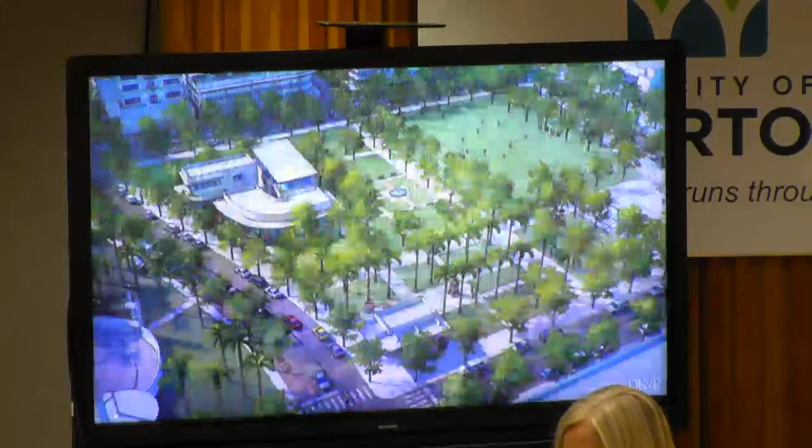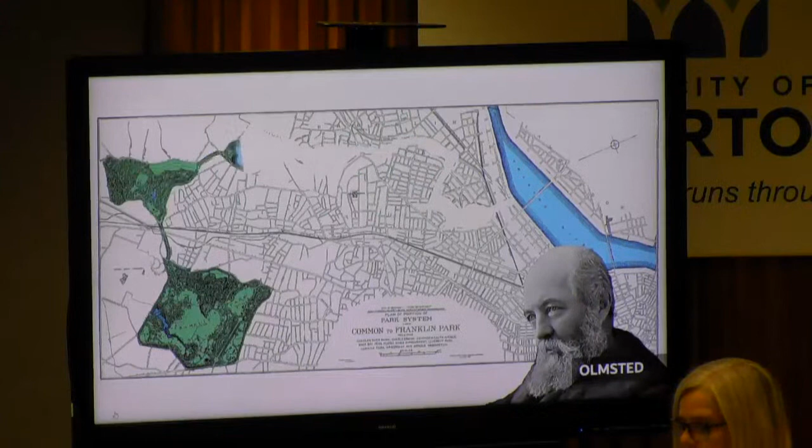The design of cities begins with streets and squares and neighborhoods, but it also depends on parks and open spaces and the connections between them. Parks, greenways, and blueways give form to the neighborhoods and bring nature into the city. In many ways, the modern profession of city planning was born with parks. Progressive reformers concerned with public health in the smoky industrial cities turned to landscape architects to create ample, green, open to the sky spaces where people could relax amid nature, and the water and air would be cleaner. Frederick Law Olmsted's idea for Boston's emerald necklace of interconnected parks and green corridors was a public health idea, a water cleanup idea, not just a recreational one.

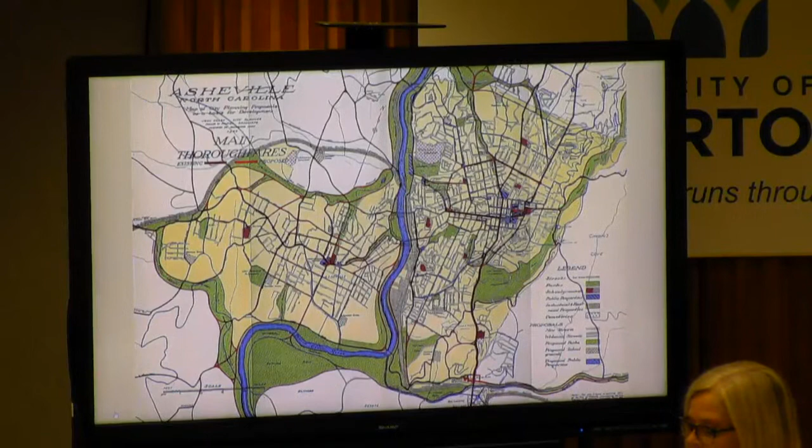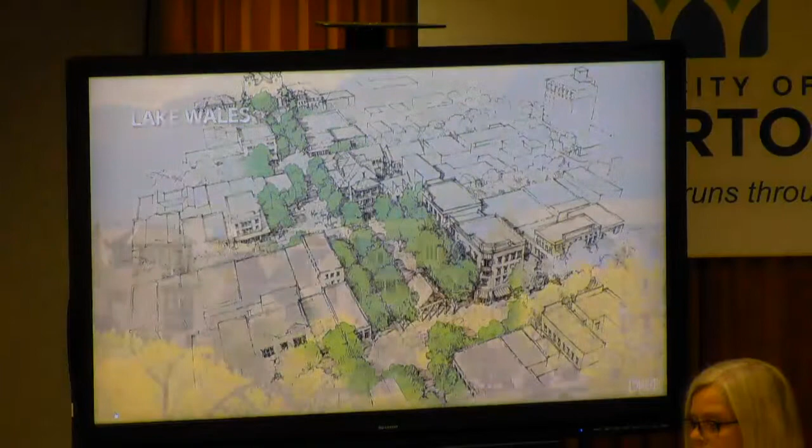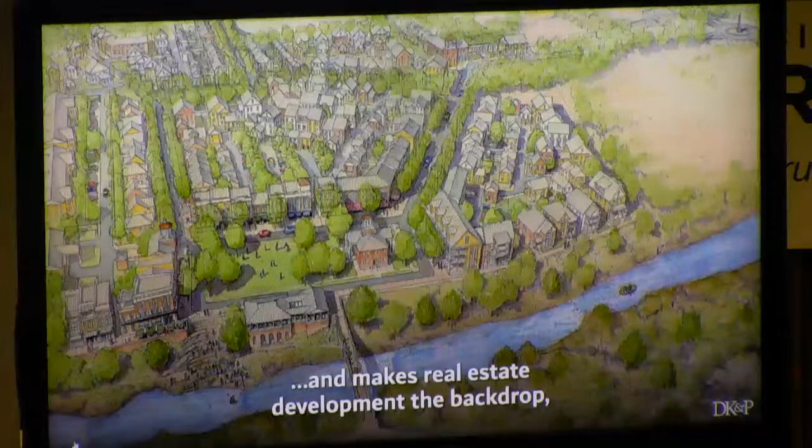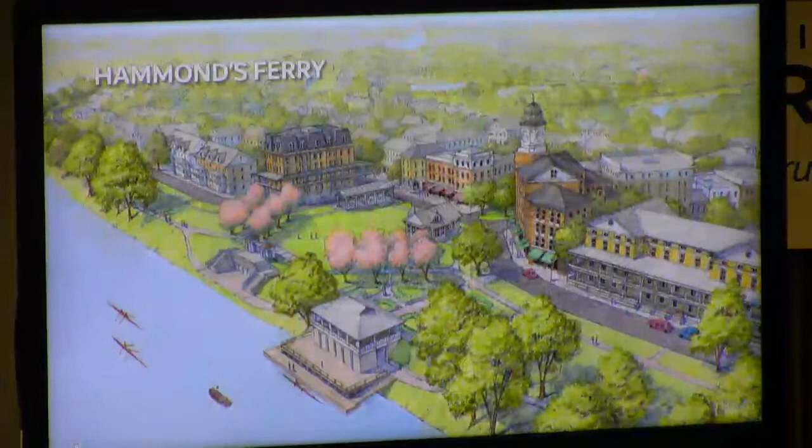Today, parks and recreation programs are often operated in their own separate departments, quite apart from the day-to-day work of city planning. But really all the plans should be integrated, especially now when park spaces hold the life-saving, economy-saving solutions for urbanism in an era of climate change.

Everyone deserves a great park. A basic national goal has been set of having park space within 10 minutes walk of every home. That's a start, but it's not just a matter of keeping the distances short. We also need good means of getting there. Non-motorized transportation on bike-friendly, walk-friendly streets and multi-user trails are all needed to connect our local parks to where we live and where we work and go to school.

Today we should think of what Mitchell Silver calls parks without borders, extending through these connections to give everyone the option of a park life. Even larger scale trail systems like the East Coast Greenway are gradually taking the interconnected web of park life to the next level, allowing for long non-motorized commutes and for bike tourism.

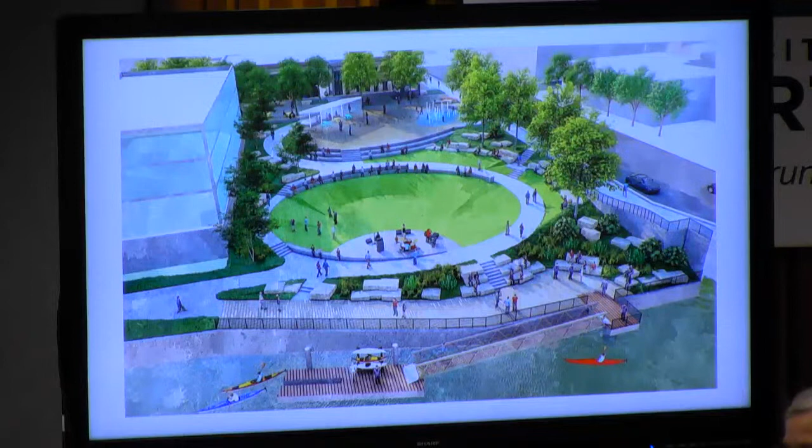This one and the next two, I included just to remind us what we've been working on so hard for the past couple of years. Every time I see these pictures they seem new to me, this was a shot I had never seen before. This is from Main Street, looking onto the west end of the park with the library off-screen to the right, and that was just a neat shot for me to see, it gets me pretty excited. It may not end up looking exactly like this, but it's a really neat shot.

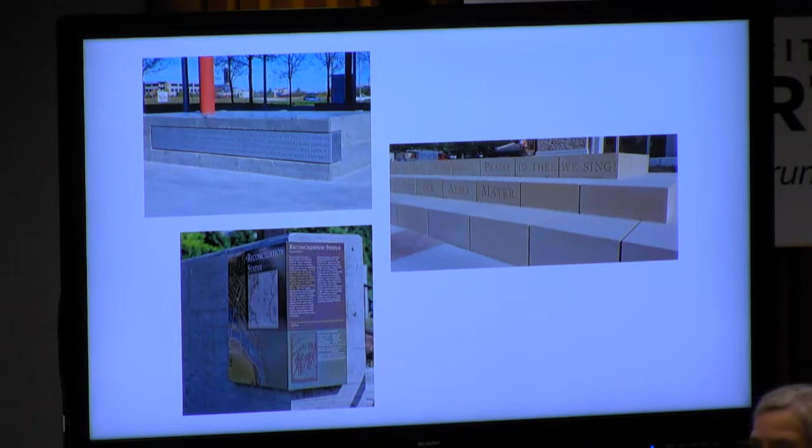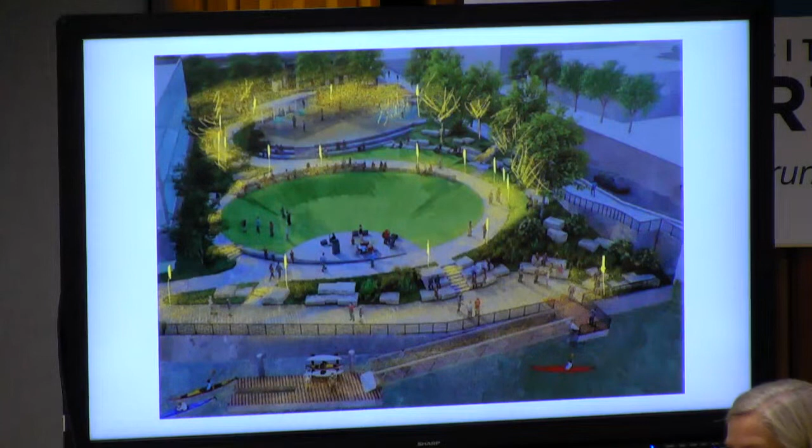The committee learned a few things in our first meeting with Smith Group. We remembered what a camel is—a horse designed by a committee. They'll give us options, but we probably need to stay within their recommendations because we don't want to end up with a camel on Main Street.

We also learned that if we've got opinions or questions, they need to be asked at the meeting because Smith Group is ready to move on—they're on a schedule, so there's not going to be a lot of time to deliberate. We need to be open and honest. What I've known with Smith Group is that they won't be offended by even the dumbest idea—they'll take it under consideration, which is really good.

We also talked about the pavilion. There are three options: movable tables and chairs, fixed benches, or picnic tables. So should this be a fixed area under the pavilion shelter, or movable? The committee moved in the direction that it could be movable, but not something that could be easily tossed into the river.

Then the shape of this structure, we picked out these bottom two, they gave us about 8 choices. The curved one on the bottom left follows this circular kind of pattern of the park. And then the style, the pergola on the right would be the kind of how it would be constructed.

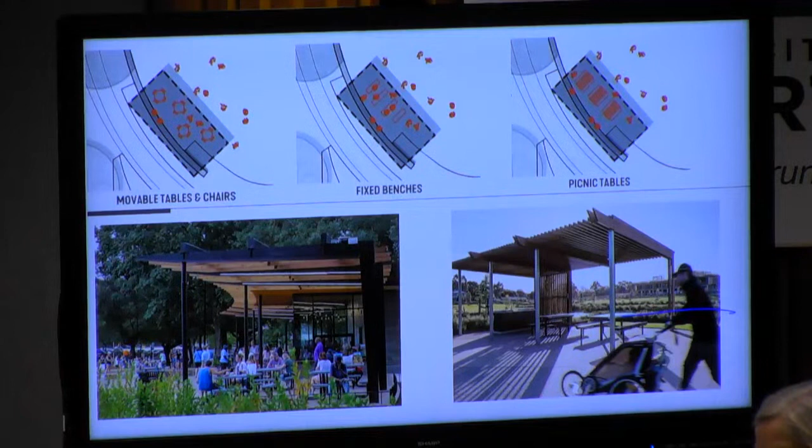And they will come back with a design for that at our next meeting. Talked a little bit about the water feature, size of it. The one on the left has 15 nozzles, the one on the right has 30 nozzles. We went with the one with 15 nozzles.

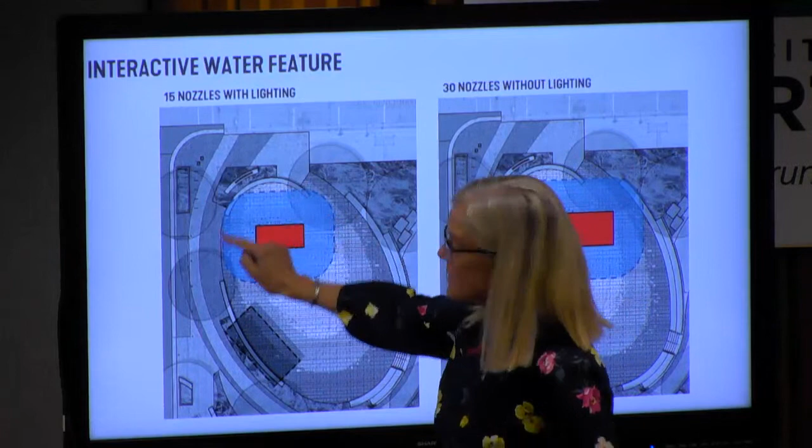If you'll notice, there is a kind of a natural curb that comes around between Main Street and the water feature. We felt that the smaller feature provided a little bit of a barrier. Put a little seating barrier here. Main Street is up there. So then you're not going to have that, whereas in the larger one, you could have getting around that barrier.

Also, it's cheaper to have 15 nozzles instead of 30. And I don't know that it's been totally decided yet, but it could be lighted at night with colors, the smaller one, for the same price.

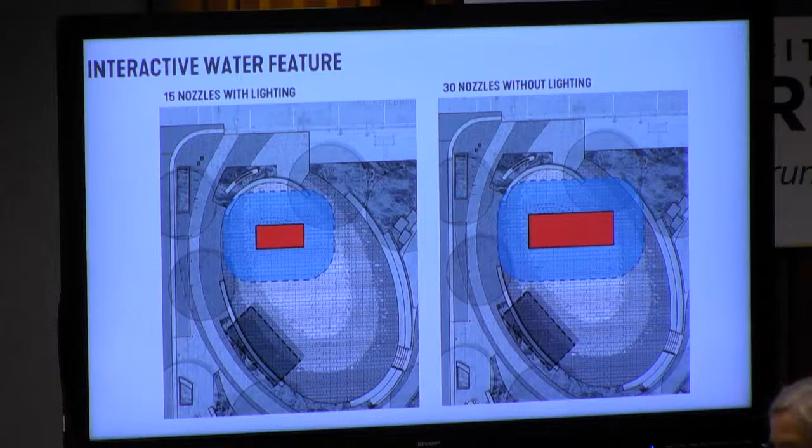Then the bridge abutment. This is a little bit hard to see when it's not in your hand, but we know that bridge abutment is going to be a tough thing to deal with, especially with the bridge being replaced. So we're not going to put something in that will be torn out in 2026. We need to put something in there temporary, but realize that if this is completed in fall of 2021, we don't want to say the park's not going to be done until 2026. So we want it to look like it's part of the park, even though it will not be long-term.

So next steps are, hey Dave, can you explain just in words a little bit about what that is meant to look like when it's done? Yeah, so if you look at the green...

They gave us several options. It could be a mural that is painted and permanent, or a mural intended to be painted over several times throughout that 5 years or whatever it's up there. They also gave us an idea like a pallet wall, a wooden structure that would look more finished and might attract graffiti, but with cameras and lighting it won't be a problem, correct?

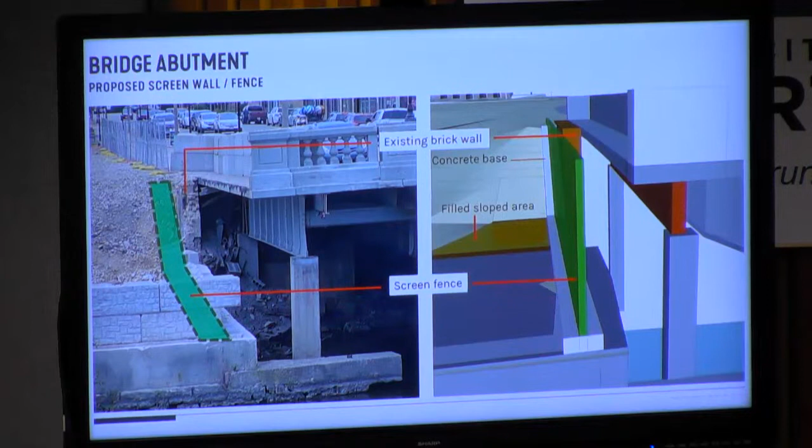So I think that's all I have. I had the next steps here. Yeah, they will be continuing to refine the plan, and then we'll have another meeting in early to mid-October.

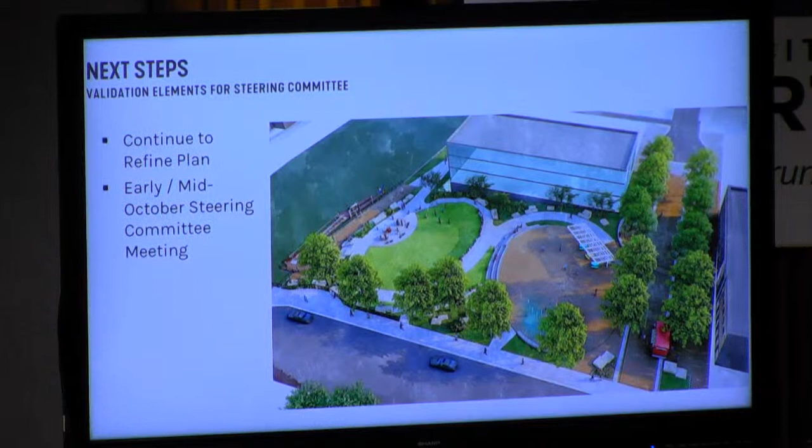I got a call today from Gene Schmidt, second call from him. He plans on performing on the stage and wanted to know if we're planning on putting some kind of roof or shade structure on the stage when people perform music up there. That is not in the plan right now. It will be open, because that allows for various sizes of performing groups, larger or smaller than that space.

I'll just give you the reason why he asked. He did a performance or concert down in Kentucky or Tennessee this summer. It was really hot, and it fried his equipment, and he got heat exhaustion, so that was concerning. He's brought this up two separate times now to me, and today was the last one.

I think first they're concerned about obstructing the view of the river. But we had talked at some point about putting in some type of poles that could hold canvas that could be removed and put up, like a sail kind of thing. He probably could perform under the structure if he reversed it.

And I'm going to stay on the same theme. Has there been discussion about any sort of electrical infrastructure in that space, or town square? Throughout the park, I believe. Chris, do we want to make sure Smith Group at least takes a look at that option of something to shade that, even if it's removable?

I told Gene I'd bring it up again, just so they can think about it and see if they can come up with some solutions, either a temporary thing like you were suggesting, or something like that for the dog days when it gets hot and sunny, and keep people safe and their equipment from frying.

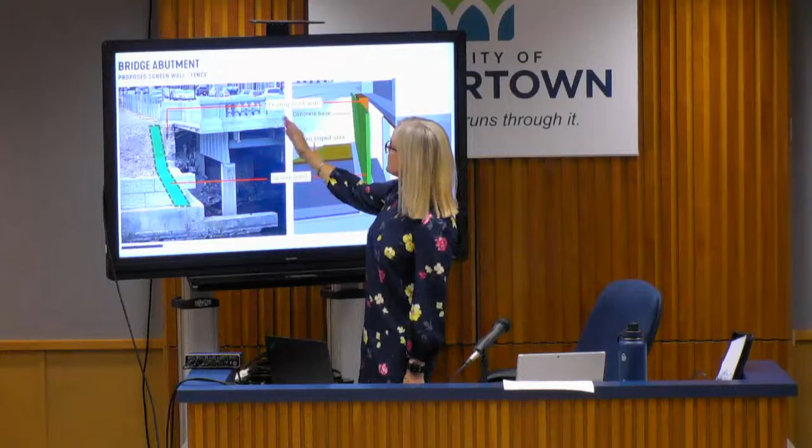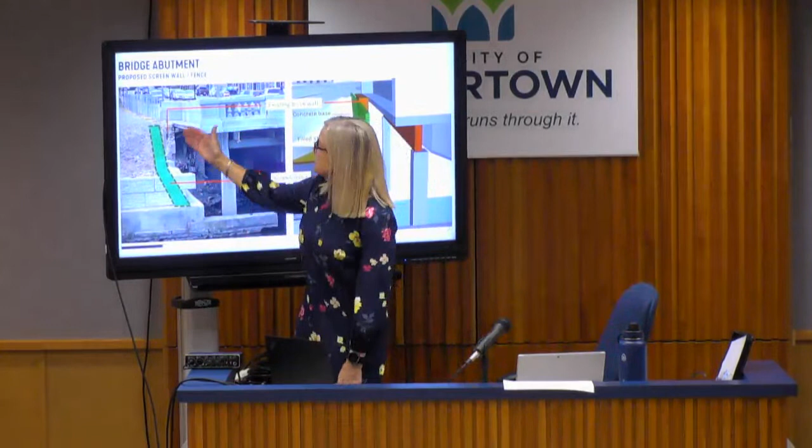And the building may or may not have been offering any support. We did get a recommendation from R.A. Smith National when they analyzed this to make sure anything wouldn't cave in when buildings started coming down. They came up with a plan for us to reinforce those front foundation walls where they were meeting the sidewalk or the ground underneath, but the bridge recesses so far back under there that there is no structure left, and they didn't give us any recommendations for that.

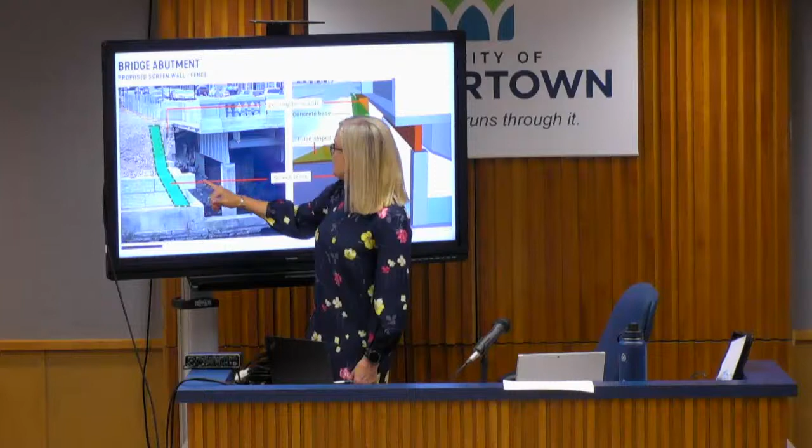So the DOT thinks more debris has fallen under here, but I've compared the photos, and the big cement blocks were all there before. Any additional debris is just the finer dirt that's fallen under there, not big chunks. So I know I'm not using technical terms, but that's the extent of my engineering knowledge. They're not concerned about anything collapsing—they just want us to remove some of the weight off that part of the bridge.

Jacob, did I describe that pretty accurately? Very well, thank you. You have an internal angle on all of this, so.

Kristen, is Smith Group in the loop on those monitoring wells, since it'll have to be designed into the plan? Yes, I asked Mike from Sigma to be in contact with Adam Hammond and vice versa regarding the locations of those wells. Sigma indicated they don't see them preventing us from moving forward with construction of the town square at all—it's just how long they'll have to be in place to monitor and where they can be placed in the design discreetly. So they're working with Smith Group on that.

We're working on next steps regarding community engagement initiatives. As Jeannie mentioned, there will be a reference for anyone wanting to make a contribution to the town square—smaller scale contributions, whether they want to sponsor a boulder or a seating boulder. I've already gotten a call about sponsoring a bench. There will be a link on the website to contact me about those, and we're working on the marketing materials for other contribution opportunities.

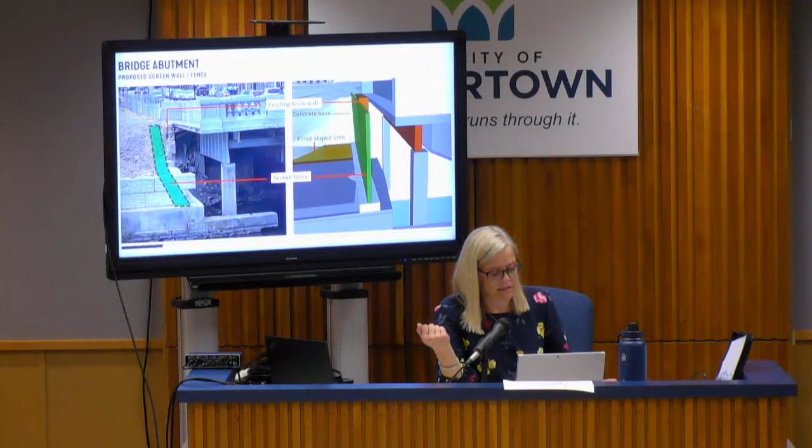On item number four under my update, I wanted to note it's been exactly a year since Brad Kenzie led the effort to talk about community improvement downtown, the property improvement with the new inspector, Del Zwig. Del and Doug have been working downtown, particularly Del, for a year now, and we wanted to circle back on that effort. Brad and I are going to have a meeting with them to get some information about how it's been going—we just talked this week about that. Then we'll have a follow-up event with downtown property owners to discuss how it's going and how we can continue to help them make improvements and keep their properties code compliant. So we're following up on that, and I think that's about it.

Right? Questions for Kristen?

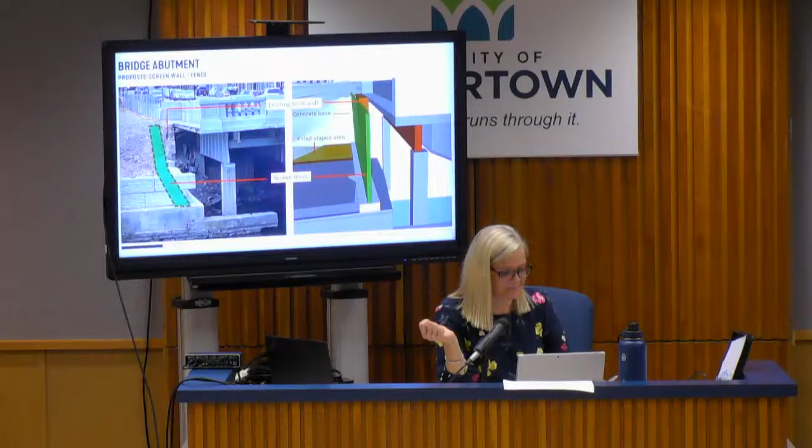Just one comment—looking at my emails, DOT is going to send an inspector Monday to do further investigation of the bridge and see what the city needs to do to shore it up in the short term.

Is he bringing the state's checkbook? Yeah, this right here, what we're looking at. What did you say? He's bringing the state's checkbook. Oh yeah, it's awesome.

All right, moving on, item 8 on the agenda is our August financial reports. Kristen, anything to highlight on those?

I did want to say that those downtown utilities are above budget because we're paying stormwater and fire fees for each address of the 6 addresses, and every month it's between $20 and $30. I talked to the water department about that, and they say they go by PIN number, and so far we still have 6 different addresses on that block.

The trick about combining those and getting one CSM is that right now we have grant applications into the state for the 2 segments of properties. We have a SAG and a WAM grant for 2 of the buildings and a SAG and a WAM grant for 4 of the other properties. So we have to finish that work, and we'll be paying for fire and stormwater protection for a while yet, until I don't know if we do a single CSM when we turn it over to the city or how that's going to work, but that's why the budget looks like it does on that expense item. The other one, if you look at the balance sheet...

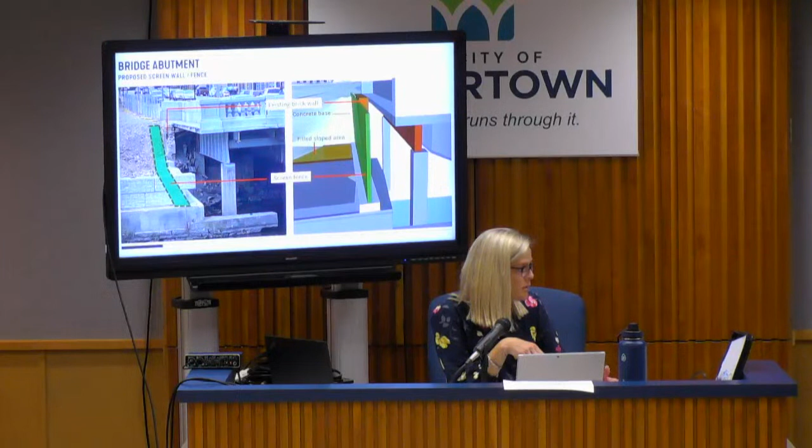Well, actually, we're paying bills and then we're getting reimbursed by the state. And it will cover a significant portion of the demolition and Sigma's work. I've paid for all of the demolition and one round of invoices on Sigma, and now I have to wait for that to clear the bank so that I can send the state proof that we paid it and it cleared the bank for them to cut us the checks back.

Can you check with Elissa then and find some way to make that reflective in the revenue budget? Because it looks like we've counted on it and we haven't gotten it, but it sounds like we have. The other thing is that half of that money is under the city's name, and, yeah, I'll work it out.

Thank you. And then the only other thing I was going to highlight is on the expenditure side, we do have the Sharp Corner sculpture, which was an unbudgeted expense that we approved, but that hit the books here. There's no criticism to that. I just wanted to highlight it, that it's on there, and it's probably the most significant over-budget expenditure you're going to see on the list.

Any questions? If not, I'll move approval of the financials. Seconded by Nate. Any discussion? All those in favor say aye. Aye. Opposed? All right, thank you, Brad. Those are approved.

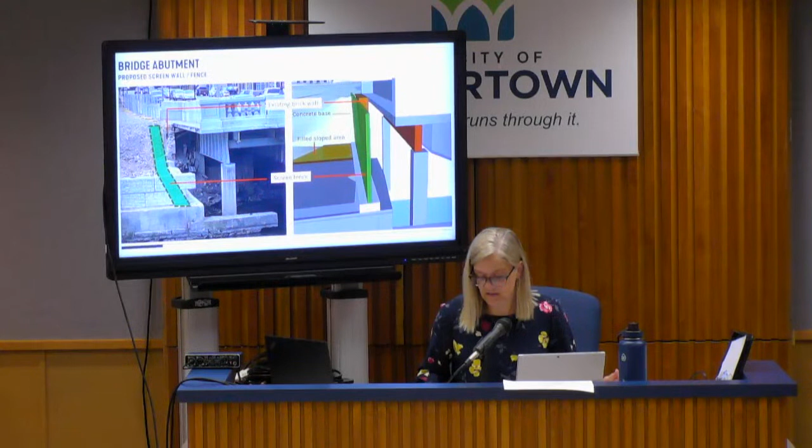Item 9, we have in front of us a resolution for the safety barricades that Kristen was just discussing to reduce the weight of those concrete barricades currently on the bridge deck. Kristen, is there anything further you wanted to say about that? No, I got an email from Andrew in the engineering department about these barriers. I think they're about $200 a piece, and they needed enough of them. They're the orange and white plastic barriers, strong wall ADA pedestrian barricades. It'll create a pathway, two sides of a sidewalk, basically a path to guide people safely from the edge of the fence to the bridge.

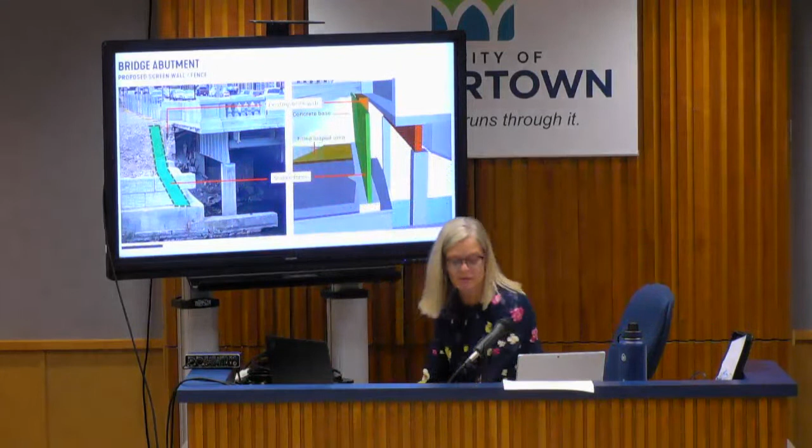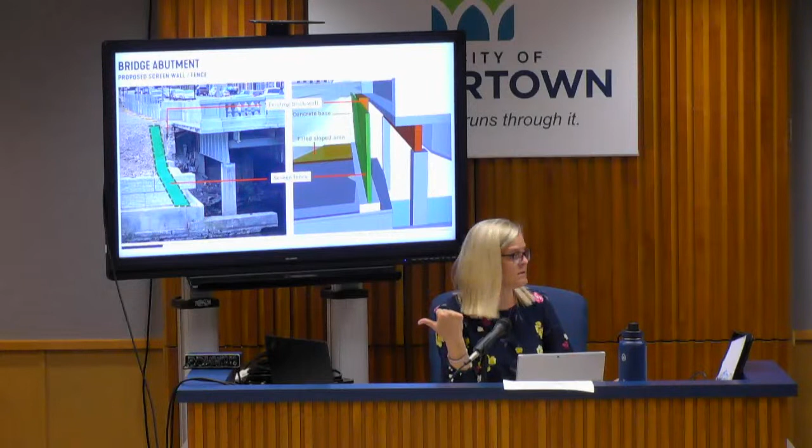I guess we will own them, so we'll have to figure out what we're going to do with them after we're done with them. The other good news is that we rented 600 lineal feet of chain link fence, and there were some sections left, so we'll be able to use the remaining sections to help get to the point where we need the barriers. From the engineering department, they found these, they ordered them, and there's a credit card charge pending in the amount of $4,935.70 they want the RDA to pay.

They already ordered them? They already got them? You've ordered them? Well, it was hard to tell. I keep getting emails about whether they actually ordered them. I think they have ordered them.

I decided to look at the strong wall from parking zone. There's $76.85 here. And we're paying $200 a piece. Must be a different one, maybe? I can look it up. Let me check and see, I got the email from Andrew.

I do have a copy of the receipt, so if you want to see that, I can show it to you. I'm just wondering, I see $76.85 here a piece. So this was an expenditure that the city has made, if I understand correctly, and it's a request from the city to the RDA to basically cover the expense. We're paying more than maybe we need. Sounds like maybe, from what you're finding. Someone jacked the city up.

Well, which I don't think would ever happen. Right. Let me see if I can find one from Nikki.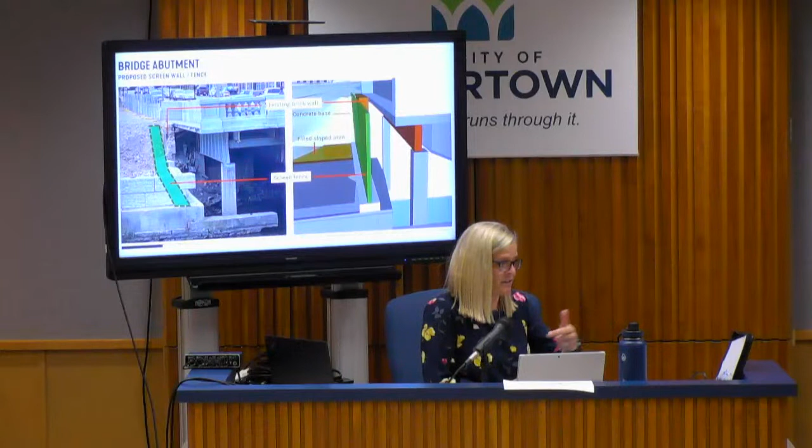So we're charged $95 apiece, sorry. There are 48 total barriers. Well, here it says 24. Well, there's 24, I'm sorry, 24 of one kind and 24 of another kind, so I wrote that wrong in the resolution. Okay. Oh, that's, yeah, 24 barriers and 24 bases. So the barricade, the base is $95 and the barricade is just under that.

$92 for the barricade, and there's enough space, $95 for the base. Okay, there's a $95 base.

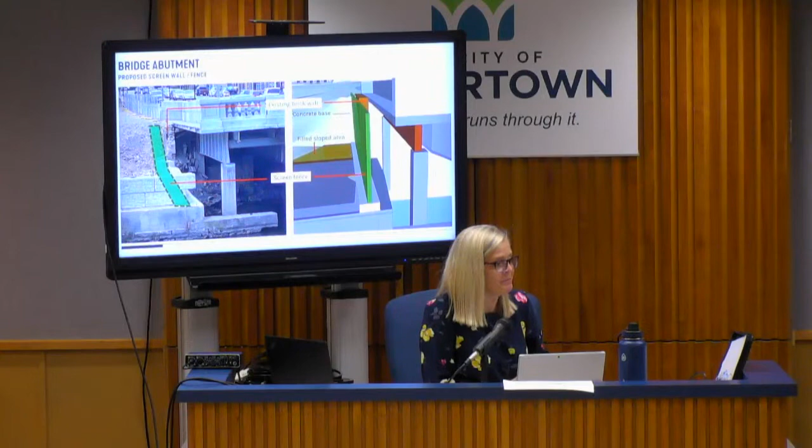I'll just make a motion to approve this expenditure for the 48 barricades, or 24 barricades, 24, or sorry, 24 barricades and 24 bases that we'll own indefinitely. Seconded by Bob. Is there discussion?

All right, we're going to take a roll call. We're spending money. All those in favor say aye as your name is called. Nate? Aye. Brad? Aye. Bob? Aye. Chris? Aye. Dave? Aye. Matt? Aye. And I will vote aye as well. That is approved. Thank you, everyone.

All right, item 10 on the agenda, we had noticed a closed session this evening, and we've had a couple of developments actually related to the purpose of that closed session, so we're going to choose to take that off the agenda tonight. We'll bring it back forward to the group again at our next meeting.

So that brings us to, when is our next meeting? Do you have any future possible agenda items? Oh, and future possible agendas. Yes, thank you. Anyone have ideas that they want on a future agenda?

Uses for barricades in the future? That's a joke, strike that from the minutes. We're going to sell them to the city. Our goal should be to create another development, another new development, every time these barricades are available, so that we can use them. There we go. All right, just could rent them out for the next $5,000 development next time.